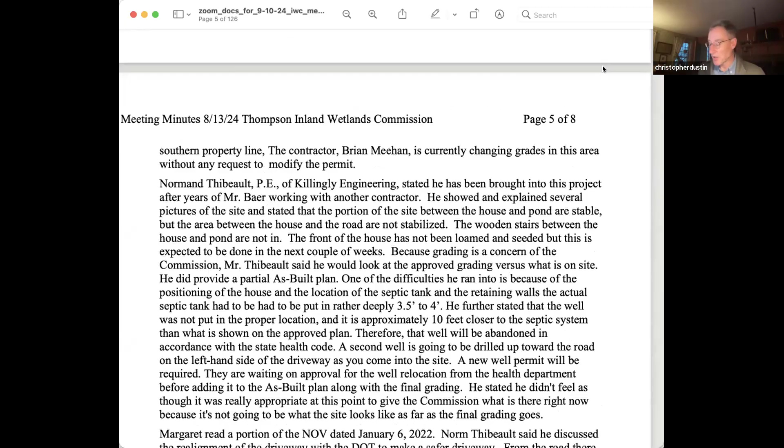While I'm here, I had a couple of minor suggestions on page 5, in the first full paragraph, the 10th line down, I will indicate this. We have a double occurrence of the phrase 'had to be,' so perhaps one of those 'had to be's could be deleted.

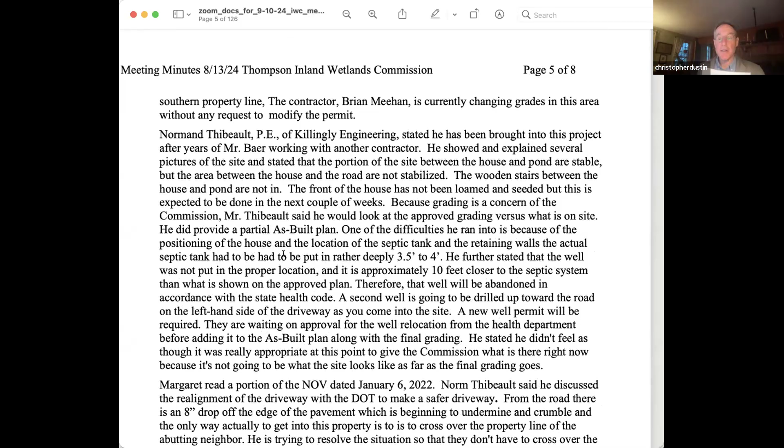And in the— is that Hamlet? To be or not to be? Had to, there we go. That's Shakespeare. And in the following paragraph, in the third line from the bottom, similarly, we have a repeat of the phrase 'is to.' So one of those 'is to's could be deleted. Were there any other corrections to the minutes?

Hearing none, I will entertain a motion to approve the minutes of the August 13th, 2024 regular meeting as corrected.

I'll make a motion to approve the minutes. Thank you, Commissioner Morano, for making that motion. Do I have a second? I'll second. Thank you, Commissioner Langer, for seconding that motion. All those in favor? Discussion.

Those are pretty minor. I think Gloria did a really good job. I thank you for the discussion and thank you for that comment. I wholeheartedly agree. There are meetings, there's a lot of substance to our meetings, and I think she does a good job of condensing that while distilling it so we get the essentials. Very helpful. I vote to approve.

Thank you. So all those in favor of approving the minutes? Aye. All those opposed? None. The minutes are unanimously accepted as corrected.

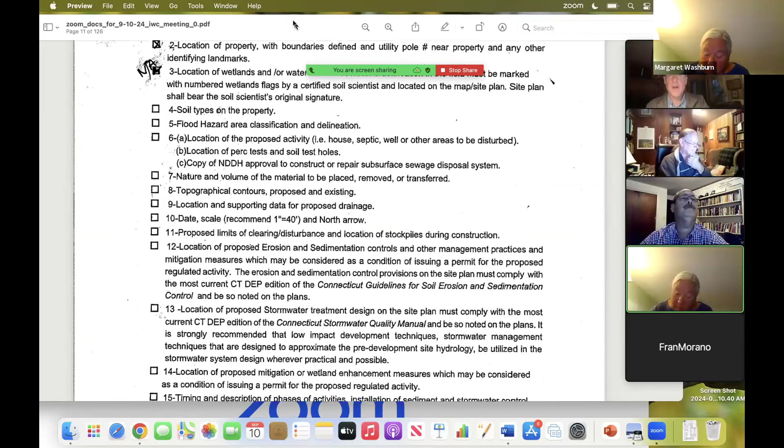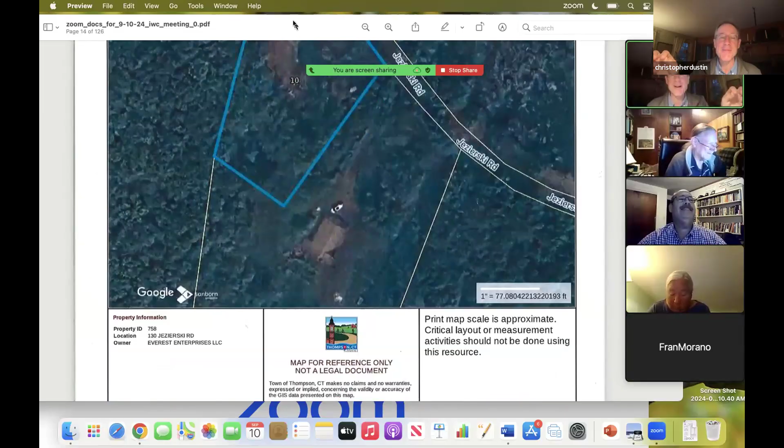I will therefore entertain a motion to approve DEC number 24027. I'll make a motion to approve DEC 24027. Thank you, Commissioner Morano. Do I have a second for that motion? I'll second. Thank you, Commissioner Langer, for seconding.

All those in favor? Aye. All those opposed? The DEC number 24027 is unanimously approved.

Okay, I'm going to move ahead to WAA number 24029, Alexander Alfred Jezierski, 0 Linehouse Road, map 36, block 69A, lot 1, construction of a single-family dwelling, driveway, septic system, well, garage, barn, and workshop.

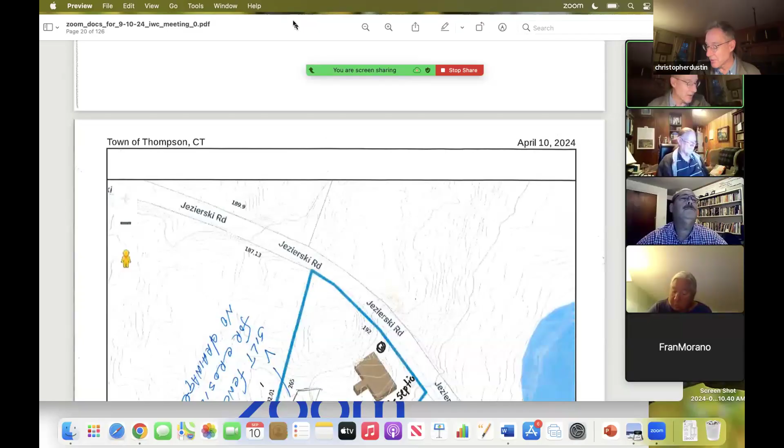Margaret, am I correct that this one still requires NDDH approval? That's true. Which means there is really nothing that we can do with it this evening. Right. So I will move rather quickly beyond.

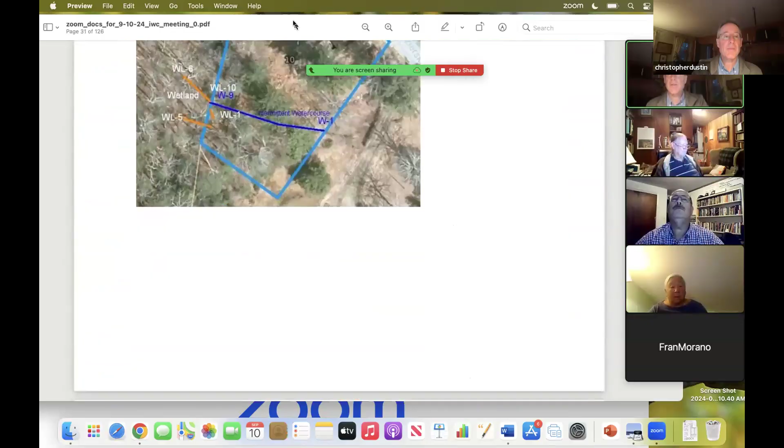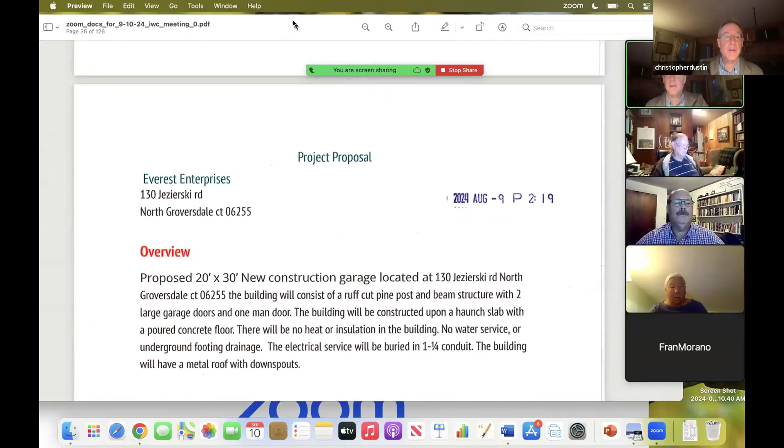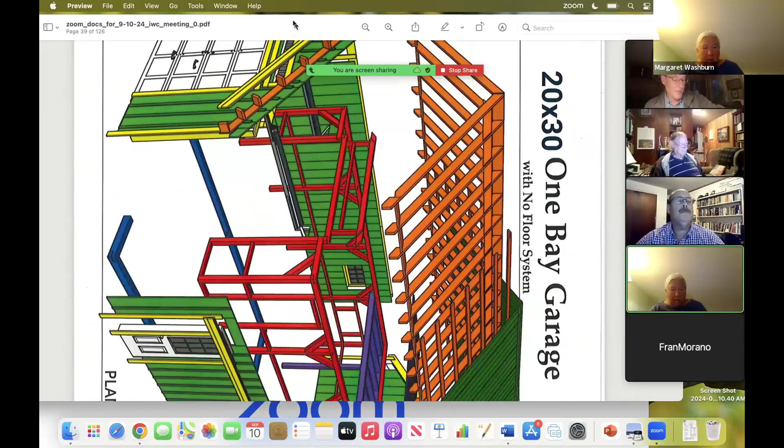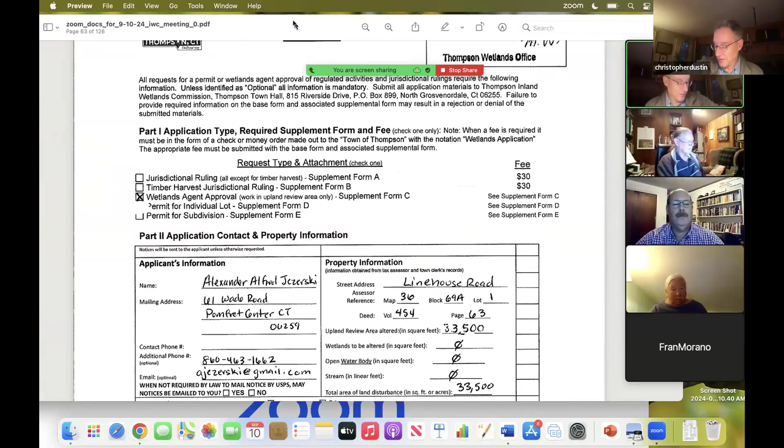This is Mr. Jezierski, okay, and this is WAA number 24029. There we go. All right, that's the one we can, we're on that's 24029, right? Yes. Okay, and no, we're not there. This is gotta keep going, if I go page by page, I can't zoom apparently, so I apologize, this is tedious. And I'll read very fast. Okay, so there's nothing to be done with this.

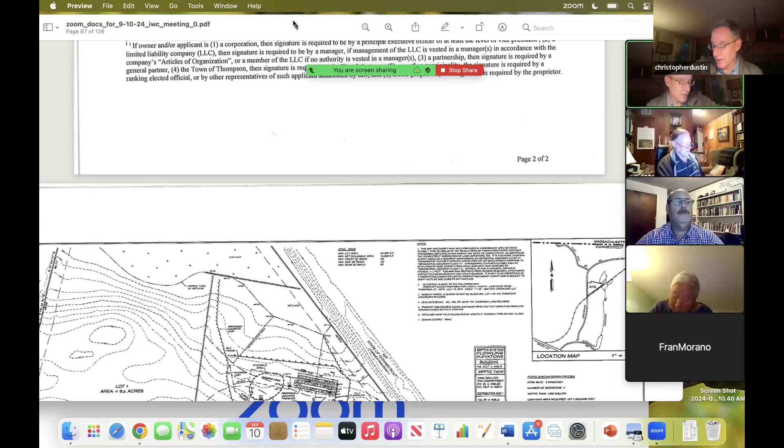And that brings us to SUB number 24031, Max Candidus, 183 Thompson Road, map 87, block 37, lot 3, 3-lot conceptual subdivision with work in the upland review area on 1 lot.

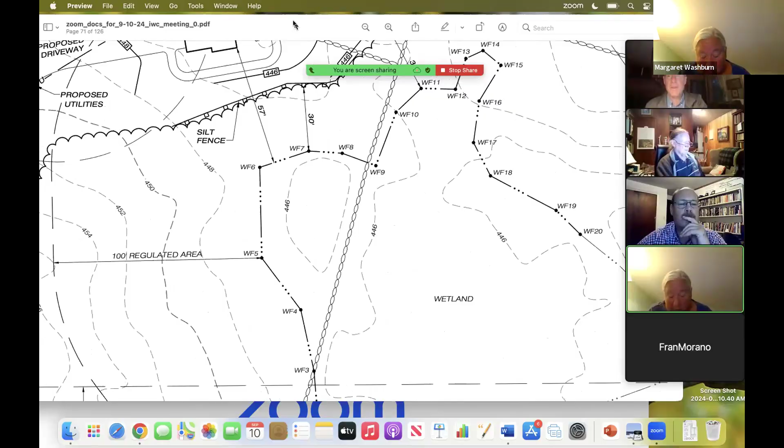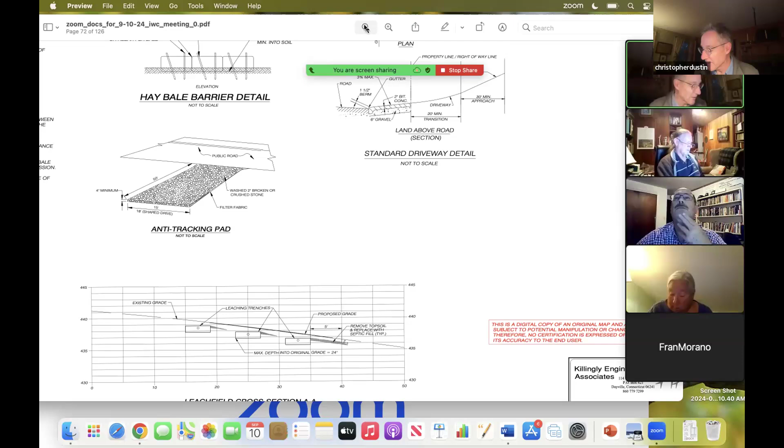I made a mistake and didn't send it to the Conservation Commission for their comment. So it's on their agenda for next week, and I apologize profusely. They will hopefully comment on September 16th, and this project should, I guess, also be on hold pending health department approval. Right, right, in my notes I had indicated only that it was waiting for Conservation Commission review. Don't be so hard on yourself.

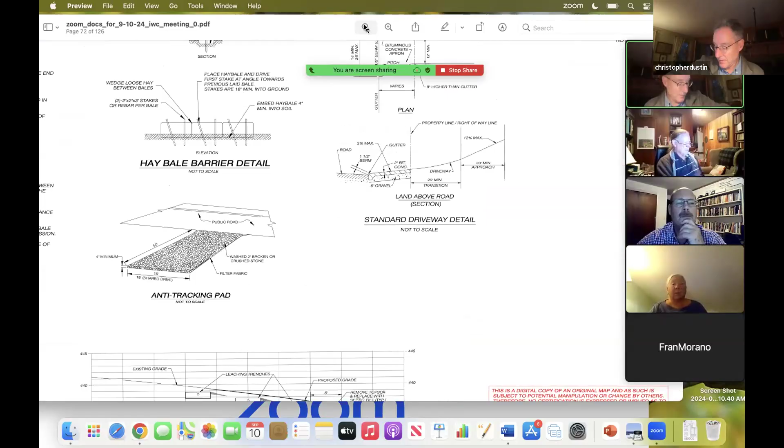Okay, so this is, we're still way back here. Okay. So this is, that's Jezierski Lane, yeah. Oh okay, no, Jezierski Road. Right, oh here's Candidus, right, okay, good.

So the commission will now consider new applications. We have no new applications that were submitted prior to the posting of the agenda. We do, however, have an application that was received after the agenda was posted, and that is in the supplemental documents, if I'm not mistaken.

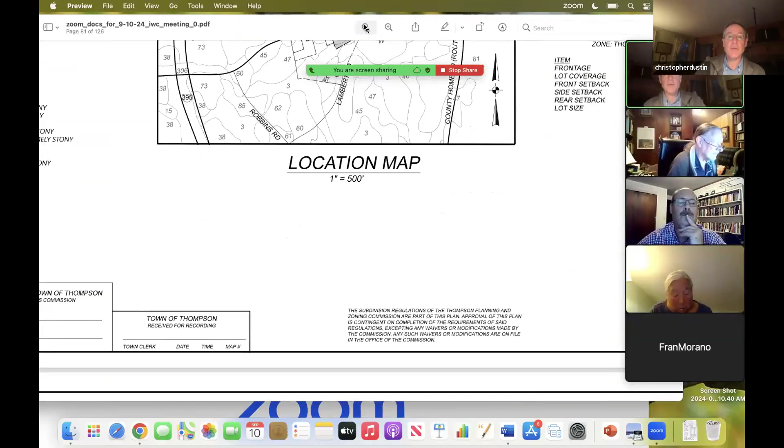So I will share my notes. Oh, sure. Okay. Shuttle back to the supplemental documents.

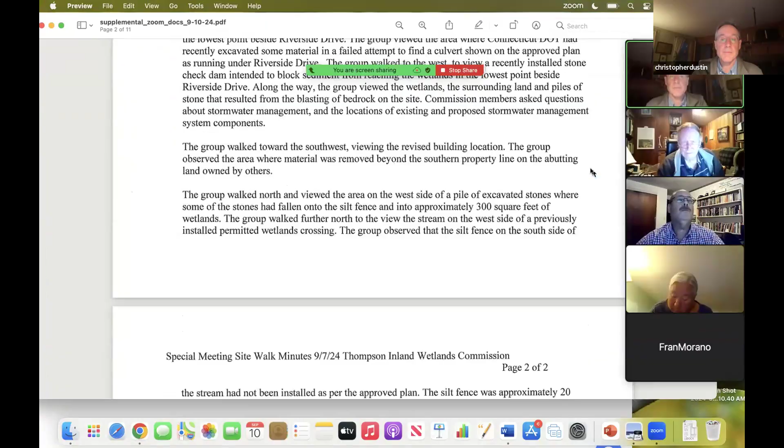This is WAA number 24033, Richard Mosher, 1552 Riverside Drive, map 55, block 65, lot 14A, restoration of earth material removed in the upland review area without a permit.

So Margaret, do you want to, I think most of us who are present this evening understand what this is, what this relates to. Do you want to give a brief introduction? I think maybe we should let Daniel do that. Okay, excellent. Daniel, I saw you were in the room. You're certainly welcome to enlighten.

I'll try. Can everyone hear me? Yes, loud and clear. All right, great. My name's Daniel Blanchette. I'm a licensed civil engineer. I work with J&D Civil Engineers out of Thompson.

I want to thank the commission for attending the site walk on Saturday. I hope it was very illustrative to everyone about the condition of the site and what we're proposing.

As we discussed at the previous month's meeting, my client, JJS Construction, accidentally removed some material on the property of their southern neighbor, Mr. Mosher. For that, we have submitted a new application signed by Mr. Mosher to allow us to restore what was accidentally excavated. Now, the total work within the upland review area is approximately 1,500 square feet.

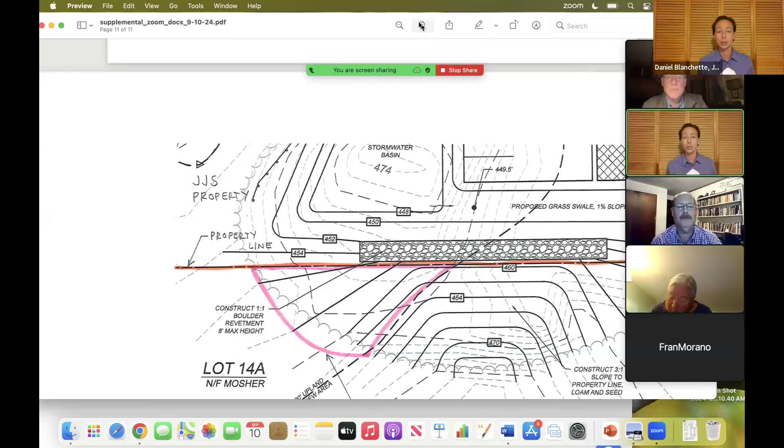Thank you, that's shown right there very nicely. And we estimate in total the volume of material to be replaced is around 900 cubic yards. So I think this is fairly straightforward.

Some material is going to be put back. It will be loamed and seeded. It will be graded at a 3-to-1 slope, which will then transition down to a small retaining wall at the property line. I think that's really all I have. I'd be happy to answer any questions, but hopefully the commission can approve that project this evening. Thank you.

I was under the understanding that the work on the Mosher property doesn't include the retaining wall. Is that right? That's correct. The retaining wall is on my client's property, a different property. And the retaining wall isn't necessary to restore the Mosher property, correct? Correct. Thank you. I am willing to issue this agent approval if the commission sees fit.

Do commissioners have any questions or concerns about this application? No, it sounds reasonable. No questions. Any others? Thank you.

Does this require a motion? No, I'm just putting it out there that I will issue it. You just give me the nod. If nobody objects, then I will do so. Okay, I hear no objections. So we're okay, thank you.

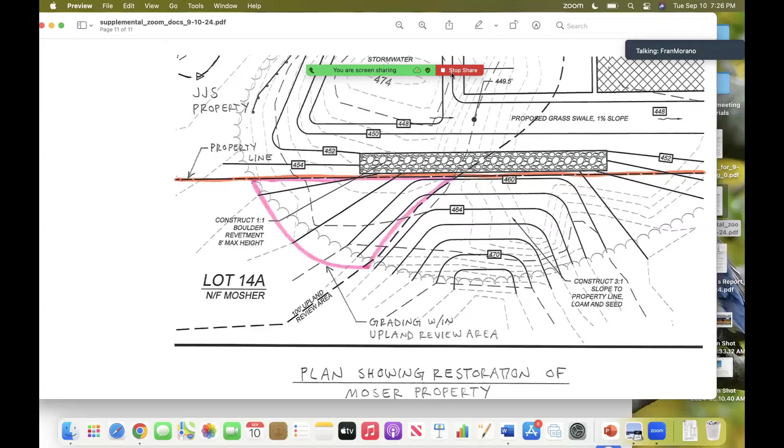It seems to me that this is just one piece of the jigsaw puzzle, that whole site we were looking at. Right, this is separate from the rest of it, it's all the same jigsaw puzzle, work in progress. Well, I think it's actually separate because it's on a different lot. Yeah, right, it is its own application. And I think it makes sense to get this done ASAP so it has time to get seeded and taken care of. Yeah, finish the job. Excellent, thank you.

Okay, and that brings us to the next item on the agenda, permit extensions. And what should be MOD number 24003, formerly MOD number 21028, Wojciech Sidika, 1574 Riverside Drive, map 55, block 65, lot 14, modification of IWA number 21028.

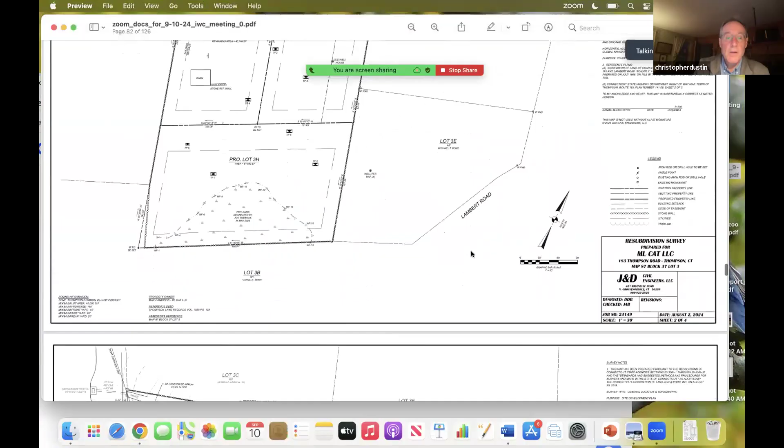This is an attempt to come into compliance for violations. So I need to bring us back to our other document set. Bear with me for a moment here. Okay, I will do my sharing. If I'm not mistaken, we can move down fairly quickly this way. Now this is not... okay, I believe this really begins here.

Margaret, I don't know if it's appropriate to have Daniel speak about this as well. I know you have some extensive notes on it in your report. Certainly, Daniel should present. Okay, Daniel, we haven't seen the plan. Okay, the floor is once again yours. Thank you, if I could share my screen real quickly, let me see if I can do that. Of course, I'll stop sharing mine. The screen is yours, sir. All right.

All right, can anyone see that site plan? Yes, yes. You can see it? Okay, great.

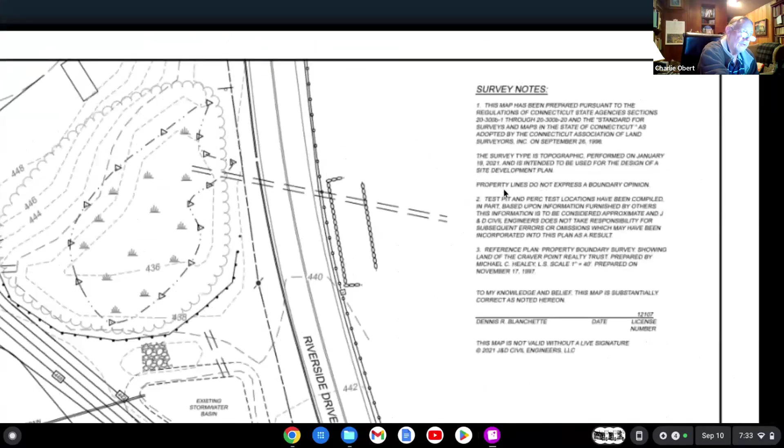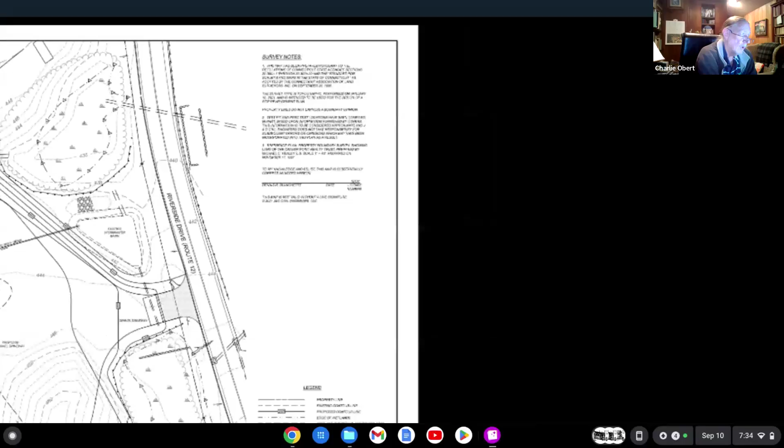While he's doing that, I have a question. On Saturday, I was asking if we would be able to compute if that retention pond area, just to the west, and the theoretical drainage under Route 12, which is not functioning. I'm of the opinion that if it holds all the stormwater currently generated on this site, if ever the state of Connecticut decides to fix underneath 12, it's a plus. But I don't think that should even be factored in, or it should be factored in with a note that says it was inspected and found unfunctional, or a note from us to the state saying, you guys aren't taking care of the fundamental stuff out here. Where's all this infrastructure money?

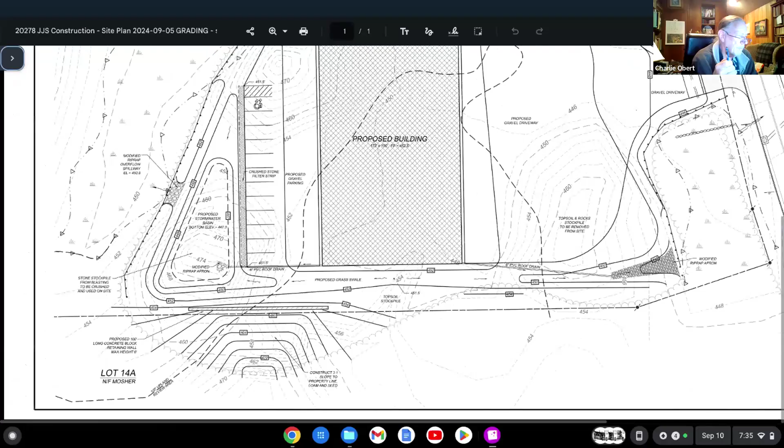I have a second question, which has to do with piles of rocks and where the retention pond uphill, what's it called? It's not Palmer's Pond, it's some pond up there. This is Chairman Dustin, it's Perry Pond, I believe. Perry Pond. We've talked about some seepage at the one area, and I'm wondering if we could just pile rocks up against it, get rid of them that way. But I'm not an engineer, you are. Toot, toot. Okay, thank you.

I guess I'll address the second question first. Looking at the site, here's Perry Pond shown to the west. Here's the large stone and mortar dam. Right about here, a little bit north of the stone dam, is where water kind of seeps out of the ground. And we have some drainage that exists to try and redirect that around from the building. I'm not sure that piling rocks up where it's seeping out will really stop the flow of water there.

I'm not an expert with dams. I'm not sure the best way to plug that up. Neither am I, but I would love to see this site with just the topo maps, nothing on it.

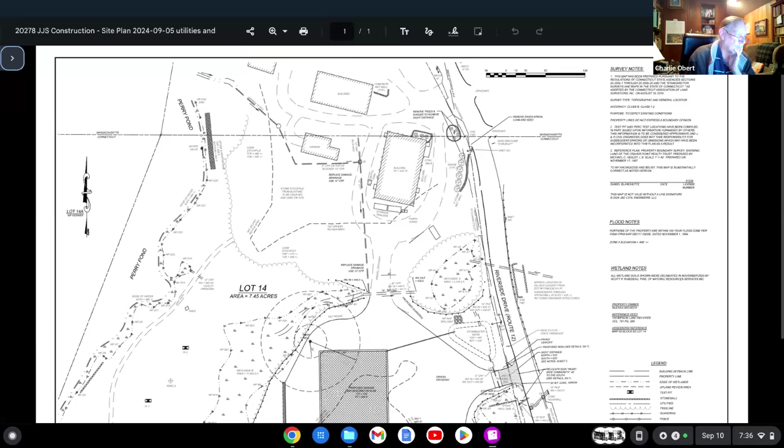Because there's a place which surprised me. It goes more straight out to the south of that pond, and then there's a very steep drop off. It comes by some of this lot 14 stuff, but it doesn't show up on this drawing. But as natural as it might have been, including both sides of Route 12, somewhere they're screwed up. 100 years ago, the weight of vehicles on Route 12 was nothing like it is now. That's out of date. It should have been fixed a long time ago, and it wasn't.

But I don't think we should penalize the client for their attempt to refurbish this lot. It all needs to be done. It's their lot now. They've got to figure out, they don't want problems with water coming downhill through their property or leaving their property. They don't want to be flooded. They're way up on top of a hill. So they've just got to take a more complete look at how the water's going through there.

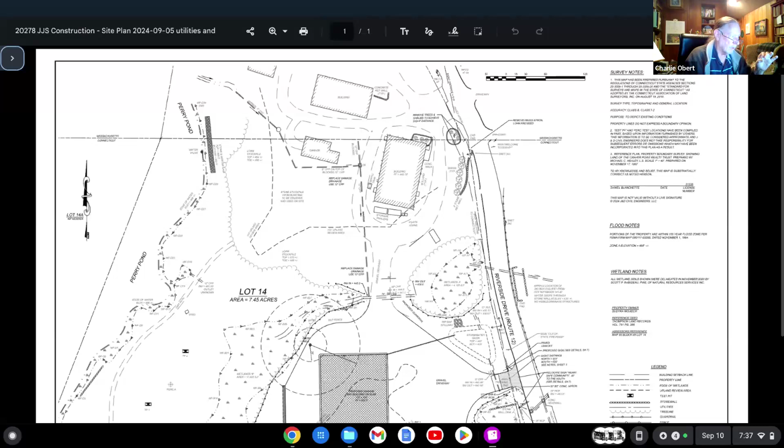I think all of these stormwater measures are adequate and correct, but I'm not a hydrologist either. But the wetlands that are up there, some of it's man-made and some of it's not.

And now we're stuck with failed infrastructure of the state. I think this area should be able to retain all of the stormwater from the property, but I asked if you could compute that. And I'm still, I see these nice lines here.

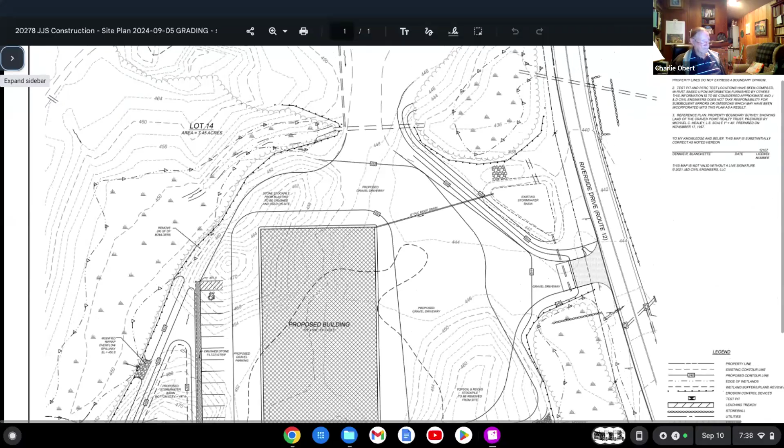So Daniel, you've removed the underground recharge areas, I see. Yes, ma'am, that's correct. Once we were able to pick the building back up, we were able to direct drainage west as was originally approved, which again I feel is a much better design once we pick the building up. If we lower it, we don't have the elevation to drain west.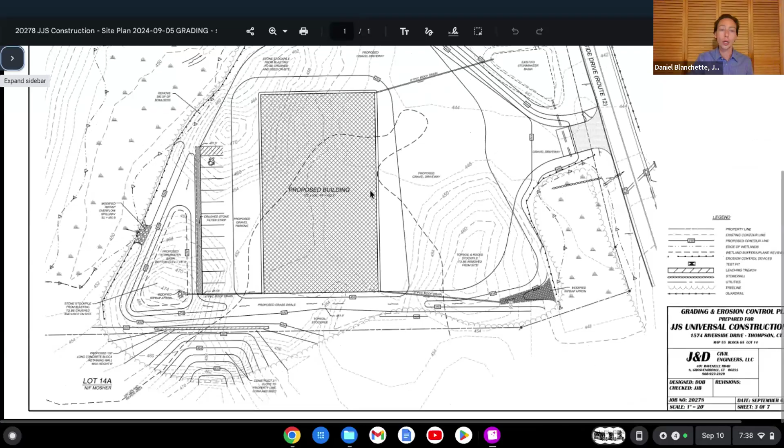So okay, we originally came back to this page to ask whether you were going to leave the pipe that was installed without any permit. This pipe here you're referring to, under the new driveway? Yeah. Right, because I strongly feel that if that pipe remains, we need a report from a soil scientist about the effects on the hydrology of that wetland.

I think that's reasonable. In a perfect world, we'll get DOT to fix the drainage here, in which case all the wetlands at the southeast corner will drain east under the road as it was originally designed. Again, in a perfect world, DOT will fix that, then we can get rid of this pipe.

So are you going to submit a revised stormwater report eventually? Yes, ma'am, I expect that to get submitted to you very shortly. So my recommendation, originally when we tried to pull this project back into compliance, I thought a modification would work. But because the scope of the project has increased, the commission isn't allowed to approve all this work under a modification, and it needs to be a new permit.

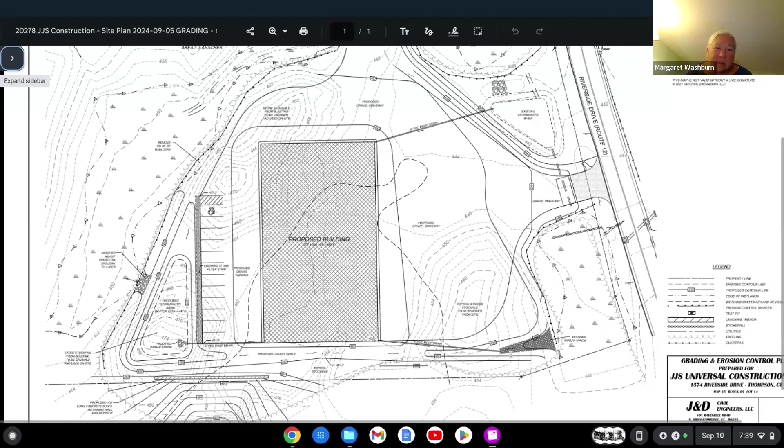Those modifications are not for the increased scope of work. They're only for changes to a plan without increasing the scope of work, unfortunately.

I see the owner, Justin, has his hand raised. Perhaps we could listen to what he has to say.

So my first question, this is, I suppose, both to Margaret and to Daniel. If the inlet of the pipe that we put in had an identical elevation to the box culvert that is currently in place, but of unknown functionality, would that not suffice to say that it isn't affecting the wetlands any more than the current pre-existing drainage structures? The elevation would be the same. I'm not sure how it currently is between the pipe and the culvert, but if the elevation is the same, I don't see less or more water being drained from the wetlands than previously, or at least originally theorized. If that makes sense. I have no comment on that.

I think that's an excellent idea, Justin. I will have to double check the elevations of those pipes and see if that's workable. I'm a little bit concerned that the pipe headed towards the road is a lot lower than the pipe headed under your new driveway, and the driveway pipe can't be lowered that much, or it won't really go into the basin with enough storage. But it's a great idea, I will definitely take a look at it.

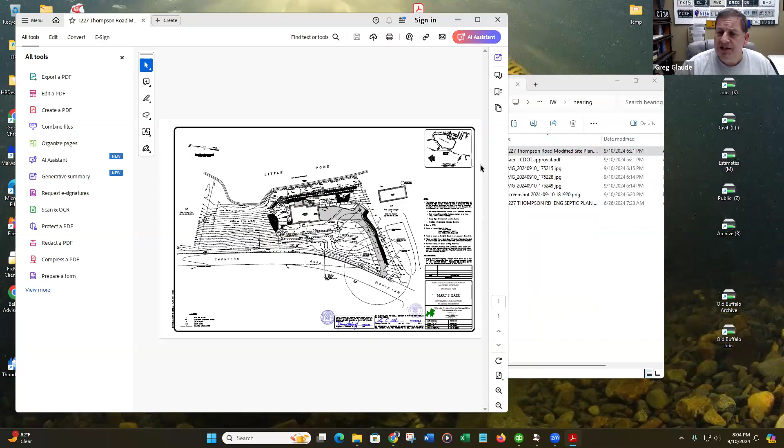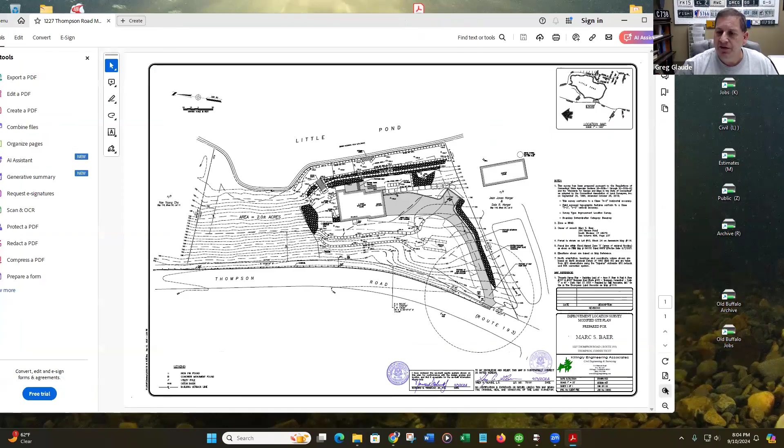Okay, so is everybody seeing the screen? Yes, I am. Okay, so this is the plan that we created, and I can point out the changes that are different from the original site plan, which was done several years prior and started by the original contractor doing the work out there. Just going to give myself a little bit of room here. So the difference between the plans: the house is constructed in the exact location as per plan.

It is built 2 feet higher in elevation than the design plan, and that did a couple of things. It helped alleviate the grade for the driveway, but it put a little more distance from the elevation to Little Pond. The retaining wall along Little Pond has been constructed in accordance with the plan, including the top elevation. I confirmed it's within a few inches of the height that was proposed. There are granite steps in the middle of the area, then a flat area, and we go to a second wall. Across this site, it's kind of a terraced site now. There were 4 retaining walls proposed on the original plan.

There are now 6 terraces, so that creates a couple of extra terraces to help with the grading on the site. It was a very extreme, difficult site for grading and for construction and trying to bring everything together.

So the second wall is here. That wall was shown on the design plan and is again in accordance with the plan, both in height and length. This third wall that we come to, just before the house, was not shown on the plan.

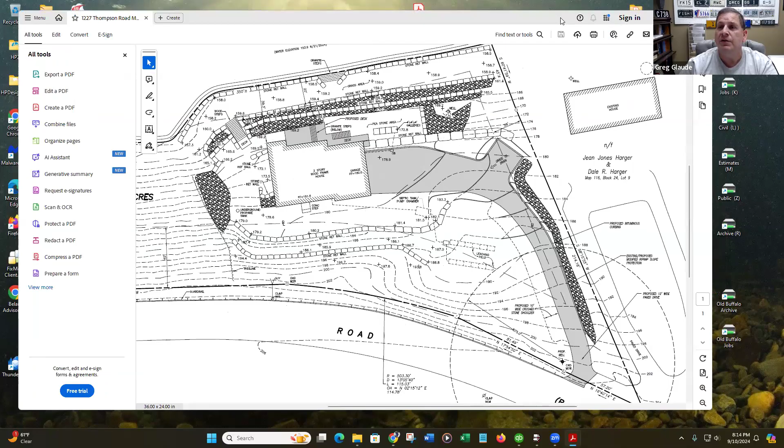So this is the original design plan, and I wanted to point out how that driveway - there was no physical way to take a right-hand turn. It went almost adjacent to Route 193. You can see the grading that was being proposed over here. So we're over this way a little bit more, but we're not doing any grading.

We steepened the slope. We are still going to have a curbing along our whole driveway, which will still make its way down to that catch basin once it's paved and proposed. You can see the retaining walls that were here on the original design - there were 1, 2, 3, 4 of them. We now have 6 in total. Again, we think it's a good design to have those tapers.

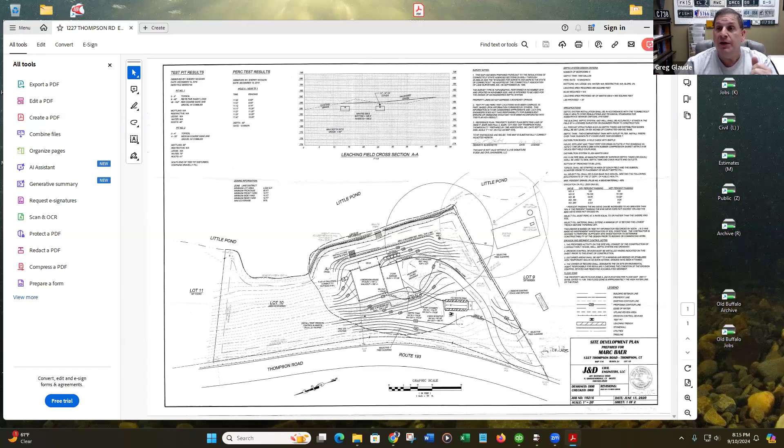I believe that's what they were accomplishing on this original plan, trying to do some sort of a terrace so that it would help or assist in keeping erosion down.

I'll show a copy of the DOT letter, dated August 20th, 2024. It was emailed, but I can send it again, Margaret. There were two attachments, so maybe it didn't go through. I got the plan and the letter from Cindy Dunn, our zoning enforcement officer. This was the complete approval of the driveway realignment plan that was submitted to them.

Now, it's my understanding that it says no work is to commence within the state right of way until you have received a Connecticut Department of Transportation permit, which you do not have yet, right? You're going to apply for that? He has applied for all of that. So yes, no activity can occur between the highway line and the edge of pavement, and he's in the process of that. I failed to ask him today where he stands, but I can ask Brian Meehan, the contractor doing the site work. Who applied for it? Brian Meehan is the contractor of record. We gave him all the information. He was supposed to apply and get that in the works, but I do not know where he stands in the process.

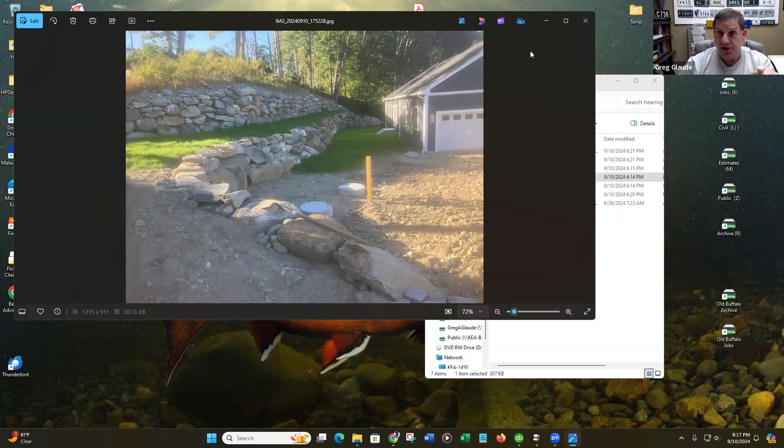The last thing I would show the commission is a couple of images. This is looking from the front of the house towards Little Pond, the area north of the house, showing what was two weeks ago - the grass seed has now fully stabilized and is growing nicely. This is looking from the proposed driveway area, that's the septic area, those are the two front retaining walls and the front lawn area, again showing the stabilization that has happened over time. And the last one is looking down where the proposed driveway will be.

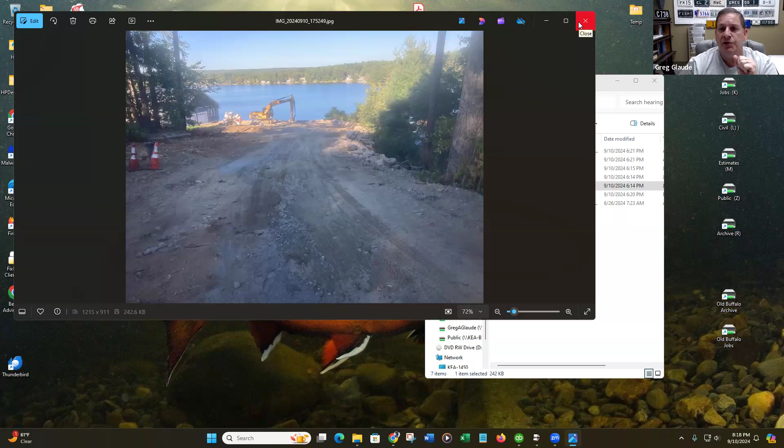Greg, did you say you're not applying for a modification? We did not apply for modification - this is a show cause hearing. I did call it a modified site plan because I wanted to show the differences and discuss with the commission.

Could you have somebody drop off a couple of hard copies of those plans and email them to me? Because I never got the email. Yes, I can have some plans and email it again. Excellent, thank you, Greg.

Margaret, did you have any further comments? Do other commissioners have questions for Greg? It seems to me that in light of the progress that's been made, the commission could entertain lifting the cease and desist order. The progress does seem encouraging, it's good to see. I'll make a motion. The progress does seem very encouraging.

Greg, could I ask you to stop sharing your screen? I'm sorry, Commissioner Obert. Much as I love your desktop, I thought it was... is there?